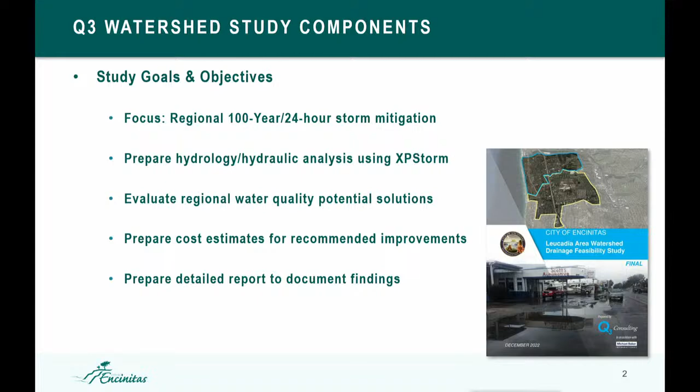It was especially with green infrastructure. So could we use green infrastructure on a large regional scale, not just a local scale? Okay, so that was one of the initial goals, to evaluate those opportunities. Yes, that was one of the initial goals, to take a look at a region. Thank you. Regional, yeah.

Okay, so as Jill mentioned, our focus here was a regional solution for, at the time, they were calling it big water. So 100-year, 24-hour, not necessarily looking at small solutions to individual locations that might flood, but rather can we identify a solution for a much larger region to get rid of some of the major flows and some of the major floods that the city was experiencing?

So right here we have the study areas. The two main study areas were Leucadia and Old Encinitas, and this was the original scope. And what we found out through the very beginning of the project was the focus very quickly went to Leucadia and not necessarily Old Encinitas. We still looked at the existing conditions, hydrology and hydraulics of both major watersheds, to make sure that there weren't any other flooding issues there, coordinating that with the city staff at the time.

Tom, my hearing isn't very good. Can you pull that microphone a little closer to you? Okay, yep, absolutely. Thank you.

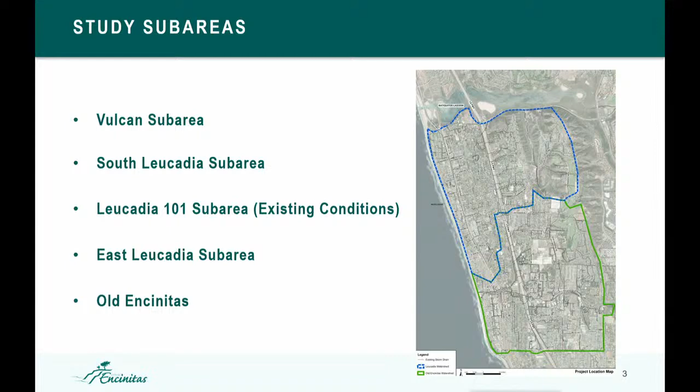So this is taking a look at the Leucadia watershed, and we divided it up into these main focus areas. And I know that there are some locations in the entire city that you can identify and point out, hey, we have some local flooding here, and we've experienced that during the process of the study.

So we looked at the existing condition hydrology and hydraulics for that based on the Michael Baker International plans at the time, which I think were about 60% at the time. So what we did is we evaluated not just their plans and the watershed, but we looked at all the watersheds and how they were linked together to come up with a solution for the entire city or the entire region of Leucadia.

This is the old Encinitas, so we identified all the storm drains. We ran the hydrology and the hydraulics. And we were surprised to see that we found a lot of local little minor locations of flooding, but there was really no regional flooding. So that was confirmed by the city staff as well. So our focus went quickly towards Leucadia.

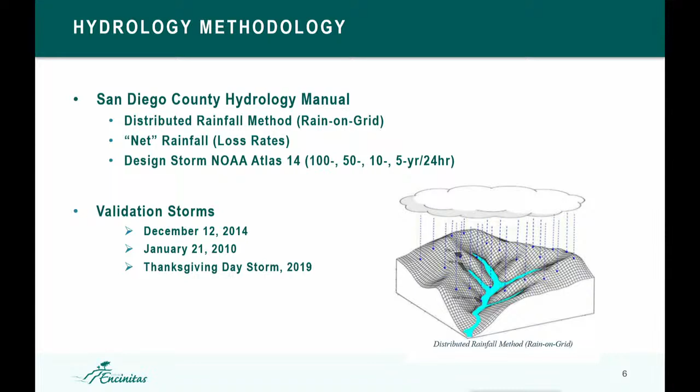So what that means is we actually got the rainfall data from that storm event. We let it rain on our stormwater model, and we looked at the results and we tried to compare that to what the photographs really were. And so that really helped us understand how accurate our models were. And then we tweak it from there until we get them close to what we feel comfortable with.

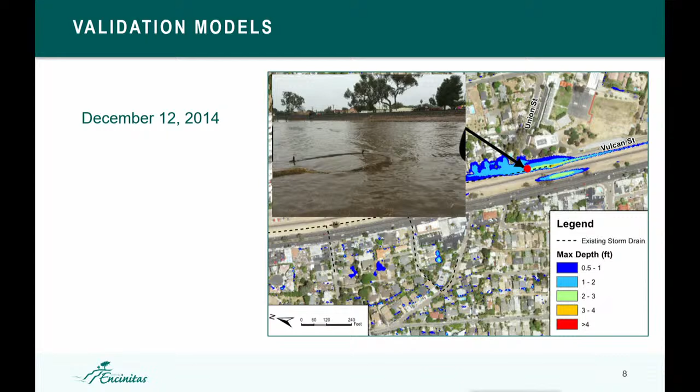And luckily, we were, I shouldn't say lucky enough, that's a bad term to use here, but during our process of our modeling, we had the Thanksgiving storm, which everybody here knows was quite large. Short duration storm event that incurred a lot of damage, especially at the park. So again, this one, we actually showed a depth of about 3.5 feet from that rain event. We actually had the raw rainfall data from the Leucadia rain gauge. And so we actually were able to model that, and we were very close with our results here.

And this is important because you want to make sure, for the most part, especially in the big flooded areas that seem to be the main concern. I understand there's a lot of concerns with every flooding area, but the main concerns of the city at the time, that we were getting at least accurate results with our existing condition models. Now that tells us when we propose a solution, we can actually see what the real effects are of that solution.

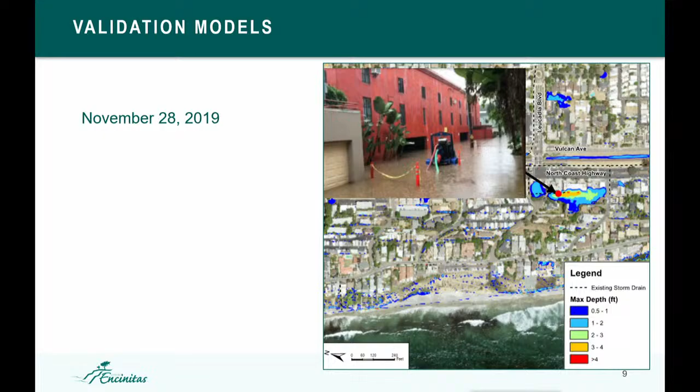That helpful neighbor, was he an Irishman? I believe so. Is he in the room today? Yes, Mr. Gary Murphy. Yes, with all those pictures. Yes. He's our librarian, yes. Yeah, whenever the city had no as-built, he would send them to me, so. Yep.

And that doesn't just mean the biggest storm event for a 24-hour event for 100 years. What NOAA does is they do what's called a nested event. So they incorporate the maximum storm event for every duration up to 24 hours. So it's actually even bigger than what you would imagine a 24-hour event is. Unfortunately, this is what you have to design to with San Diego County. I say unfortunate because sometimes it produces storm drains that are so big that nobody can build them.

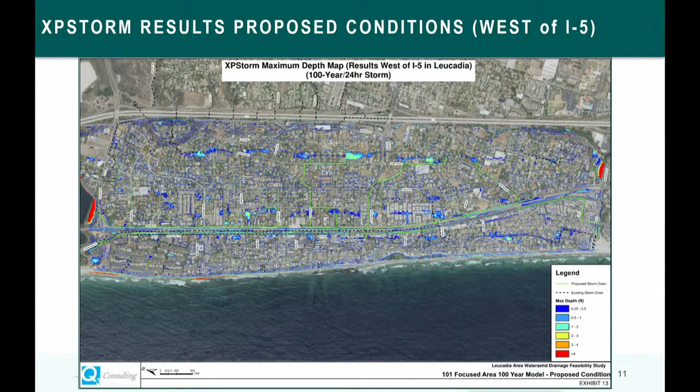So we can put really big inlets there, but the flow will skip the curb just 10 feet upstream. So it's not as easy as saying, hey, let's put a bigger pipe, because the flow doesn't get there. A lot of these flooded areas are in the back of the houses. Right. So unfortunately, if we had curb to work with, I think a lot of this would have gone away. And I'm not saying it's a bad thing. It obviously looks a lot better and it's more natural. It's just there's some problems that will come with it with respect to flood control.

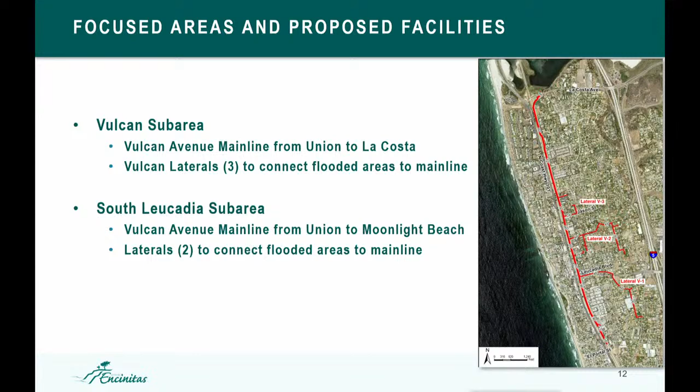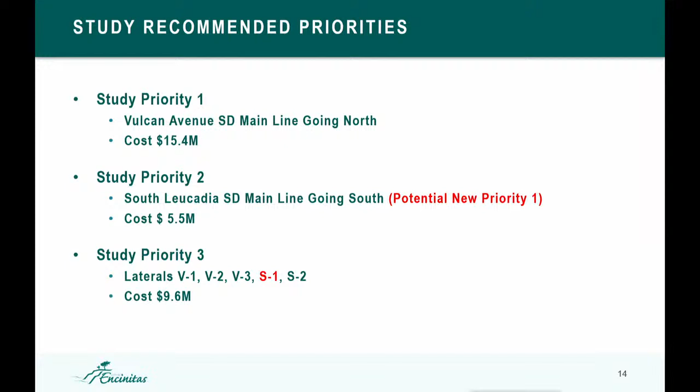So that was just kind of going through the priorities. Here in red, this is where I was talking about before, that it looks like now South might actually be becoming a priority one. The study lateral S1 would be accompanying that. So this is kind of the recommendations. The total cost at the time, again, these are concept costs. This used to be called a master plan; now it's called a feasibility study. These are really concept level, and they will be refined during design, but we came up with about a $30 million cost for the two.

So now that the study is complete, staff's role is to look for potential grant funding opportunities, state, federal, local, and then we can look at potentially phasing in these projects. If council direction is to pursue one or the other of the two main systems, we can put together some costs for the design and permitting of that first phase and offer that up with all the other priorities throughout the city during budget deliberation time. And with that, we're ready for questions.

Okay, why don't we work on preliminary questions, and then we'll go to speakers. Yes. Councilmember Ehlers. Yeah, if you could go back to the cost you just had up there, the 30 million, does that include finishing the L101 segments? Nope. And do we have an estimate for that? I think staff gave a presentation on the 14th of February that had those estimates. It would be great to get them all in one chart where we could see the total, because it just confirmed for me that L101 is the first priority, and then the second and third could be flipped depending on our preference.

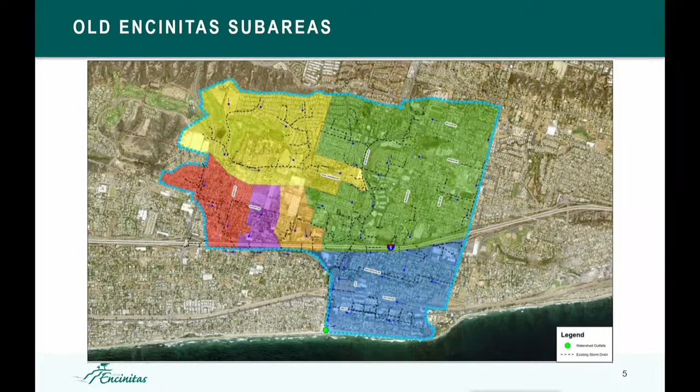But looking at that map, I want to be clear as well. The eastern portion of the city from the golf course, basically west to the freeway or to Vulcan, you looked at it enough to be able to draw the arrows and chart... not that one, the one before the yellow. Yeah, so you've got a big yellow area there, but when all was said and done, you focused almost exclusively on Vulcan West.

So I see you looked at it enough to be able to chart with arrows and dotted lines the way the water falls in that area, but beyond that, you recognized fairly quickly that there aren't many flooding problems there, and that some of the newer neighborhoods up there have stormwater facilities already, and they have curb and gutter and other things. So I wanted to probe a little bit how much time you spent looking at that easternmost area, east of the 5, in the yellow area that's on the screen right now.

Sure. So the boundary between the yellow and the red is really fuzzy. There's actually a low point in that area, so you could basically draw the red further north, or you can keep the yellow the way it is. So that's kind of a mixed area. We did actually tie a little bit into two of those areas, and I know there's a third area that we left alone. To answer your question, we had to model that yellow area

as well as Old Encinitas, so we had to be very careful and input all the as-built information into the models, the rainfall, we had to look at the land uses, we had to identify where the curbs really existed. Sometimes the topography doesn't show the flows, so we have to actually manipulate the topography to show what's really out there. But you're absolutely correct, there's a lot more curb and gutter there, so it was able to contain flows in the streets much better, and you had a lot of steeper streets in some of those sections. So yes, we did look at it, and those areas between the red and the yellow, we did identify some issues, but they were taken care of as part of the red.

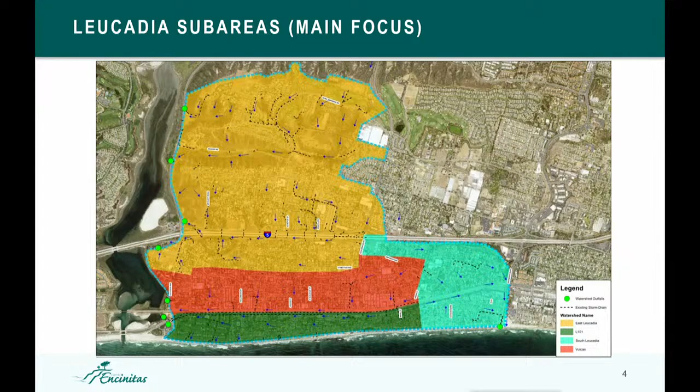All right. It's my first time up here. Good afternoon, Mayor Kranz and City Council. My name is Mike Hansberger. I've been a resident of Encinitas for 30 years. I'm here today to speak on agenda item number 1, the Leucadia Area Watershed Drainage Feasibility Study. Having looked over the study, I want to thank all the parties involved in assembling so much information so thoroughly. I learned a new word in bifurcation. As a teacher, that's always exciting.

I do want to point out what I see as an oversight in this study, and that is the flooding that happens on the 400 block of East Glaucus Street in Leucadia. I've lived on East Glaucus for 22 years. I was here for all 3 of those validation storms. I remember 2 of them very well.

I'd just like to share a quick video and a photo showing the flooding on our street and down our driveway. There's no sound, and I sped it up for time's sake, so it's going to have a little bit of a silent movie feel. But this is our driveway, and here we have what we refer to as Lake Glaucus. And what you can see is a lot of that runoff running down both the north and south sides. A lot of that's runoff plumbed off of other residences, and now we're in our driveway.

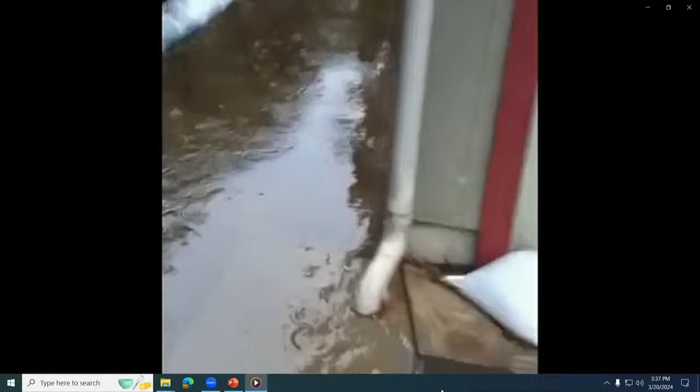So once that bowl fills up, then it breaches over and then pretty much just washes us out. And this isn't really a substantial storm. This is a good one, but we've definitely had worse. But this is basically the flow of the water as it runs through. You can see there it's about ankle deep and flowing. And then it ends up in our yard, which we share with our neighbors behind us, and then eventually it leaches through.

So, anyway, can we just go straight to the photo? What year was that? That year, I can't remember specifically, but we'll get like 3 or 4 of those a year.

So what I'm hoping is, one, that this flooding on East Glaucus can be addressed maybe as an addendum to this study. In addition, I'm hoping that East Glaucus will be considered in the alternative alignment of the V2 map in the study, or even better, an addendum to the study to investigate the feasibility of having East Glaucus Street drain down Orpheus along the frontage of Orpheus and the 5 freeway.

That's where our pump trucks go to drain water, which potentially we could access. We are a major thoroughfare, and my hope is for the safety of everyone that could be a possibility. So thank you for your consideration. Thank you.

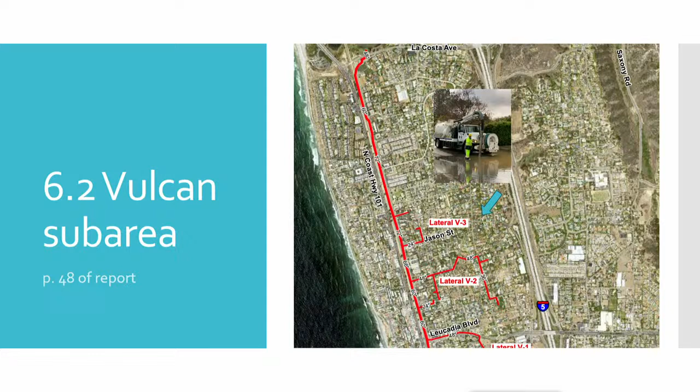As you can see, the blue arrow is where East Glaucus is, and I do want to thank city staff and everybody for helping us. We have 2 drains that collect the water now, and pump trucks do come and pump if it is not flooded in other parts too much. So the city does know we've had this flooding issue for years. Could you go to the next slide, please?

What I want to talk about is that our East Glaucus is right off of where the V2 extension is. So currently, they have the V2 going to the solid line right off of Encinitas onto a street that is a cul-de-sac, and it's dead-ended. And there's very little water that actually collects on that street. It's actually a private street, and it has a French drain, so I don't know why it's going there. The extension would be great. If we could get the extension up and over the hill, that would be fabulous.

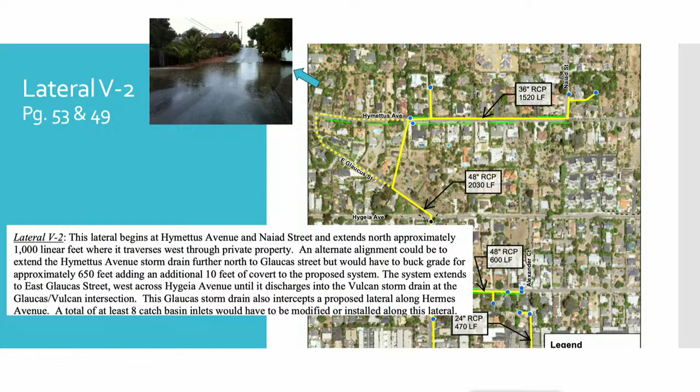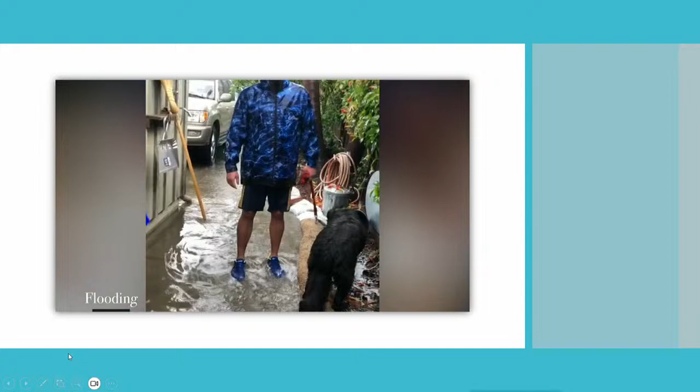Next slide, please. Can you hit play on this? So this is a more recent rain, and obviously this is not a huge rain because I'm outside. My neighbor ran his dog over because he wanted to see how bad it was. I said, well, come on down. Let me show you what happens on just an average rain. We drain the entire neighborhood. There are 10 houses on our street, and every bit of water runs down that street, down my driveway to my backyard. I actually have rain boots that I have to wear to get in and out of the house.

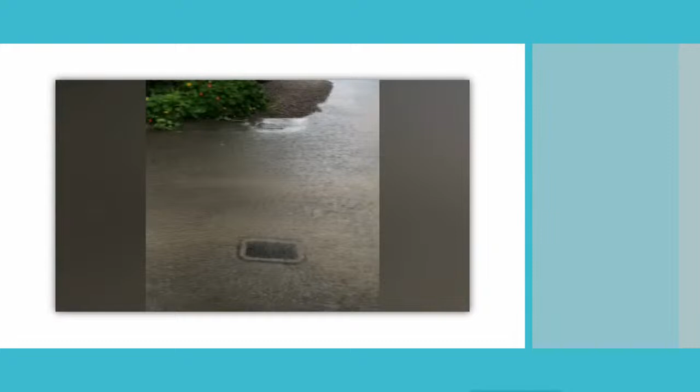If you look, he's going up the hill. Everybody's water comes down. It comes from every single spot, from Encinitas on that side, Eolus the other side. We actually have neighbors that pump water onto the street. We not only get water, we get mud, soil, dirt, contaminants, everything is running down my driveway. Can you do the next slide, please?

For the last 20 years, we've been dealing with this. And I do appreciate staff because you have been helpful. So this is why I am so shocked that our house and our street is not in this study, because it is known that we flood.

So anyway, thank you. I am sorry I didn't make any of the other meetings. I don't know how I missed them, but I appreciate you all looking into this and adding us to this solution. Thank you.

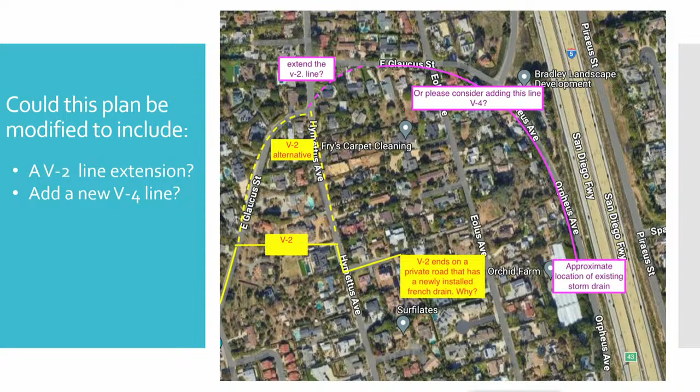Hi, guys. How's everybody? Gary Murphy, 123 West Leucadia Boulevard. First thing I want to do is I want to compliment you guys. I've been working with council since 1995. I worked with all of the consultants. Barrett did the 9-foot diameter pipe that Tom brought up, and Rick Engineering came in and did the other ones that come through here. And I've read every report. This is the first council and engineering department that went after the whole thing when you guys had Tom do the report, when Q3 did the report.

You guys have worked with me. Not everybody has, but quite a few of you have. I'm hard to work with. Tom is fantastic. Q3 is probably the greatest thing that ever happened to the city of Encinitas. And I think we need to keep him on as our consultant so that way he can help this couple right here with their problems. But he has to know all the little nooks and crannies, and him and I have spent a lot of hours. Okay, so he should get paid for having to put up with Gary Murphy.

But I want to compliment everybody in the city. I want to start with Public Works. Man, they have come so far, and they're kicking. There's Rob at Street Management, he is kicking it, and his men are fantastic. Jill and Matt are doing everything they can, every which way they can. And you guys as a council, I'm going to compliment you. I don't do that very often for councils. We got a long ways to go. There's a lot of money that needs to be brought in. We've made some good improvements.

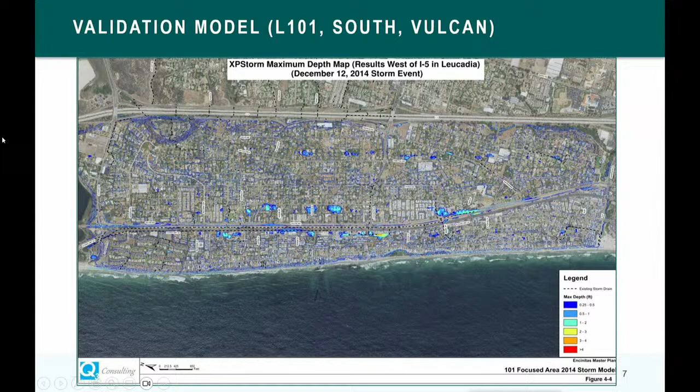Stand by. Okay. And this is important, so take your time and get it. Visually, it's nice to see if you have an exhibit.

It is good to see. But that was one of our original areas that we were looking at, and it shows up in our models as flooding. And there's actually another area too that's very similar. Just a little bit more then on how you prioritize. You said it didn't reach the priority level in what regard? Why? Usually that means what the city's focus is on with respect to what they consider important.

So we have hydraulic capacity as one, so this would obviously be a higher priority on that aspect. It also goes down to what regionally they believe is important, and you made a comment about the private street. That was more that we were going by it anyway, so I actually just made the call to extend a lateral there, because one of the priorities was from the south of there. So we had to take the V2 line up that way anyway, so I'm like, I'm just gonna go grab that area because it doesn't look good. So that's kind of how that all happened.

It helped that low point because they also have a dry well that doesn't seem to be working as well. But you're right, I think a future project could be to go and grab that with an 18-inch pipe. Okay. Now we understand that those dry wells are probably not making a big enough difference. If I could just summarize, there have been a few things that have occurred that we now know better since this report was completed. Yeah. And maybe we could fine tune some of that. Yeah, exactly. And really improve our knowledge and our response to these.

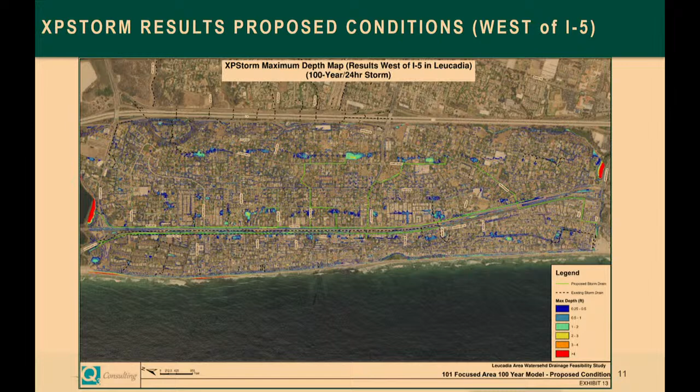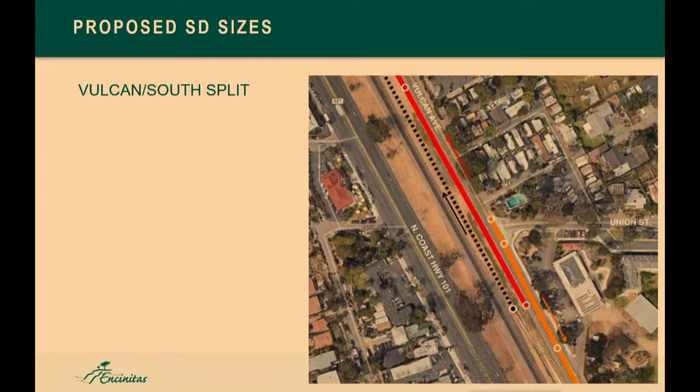Yeah, let me try to find a difference map. So the green one, is it? It's one of the extra ones. It's the green one, like at the end. Yeah. There. This guy? Right there.

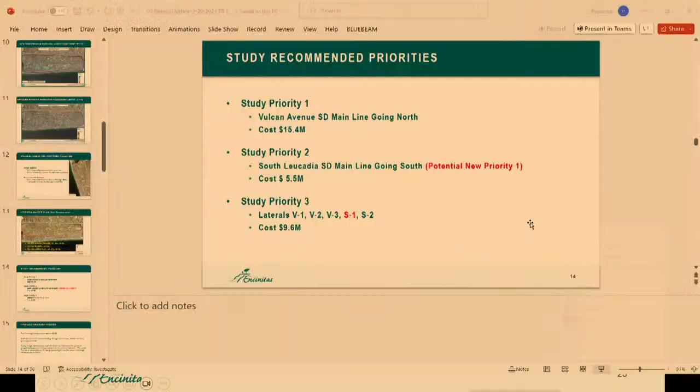And, can you zoom in on just this? Use a mouse to show where. Let me see. Oh, sorry. Hold on. Yeah, there you go. So go up. Yeah, right there.

So there you see the Glaucus Street to the left of the big green blob. That big green blob is what that private storm drain can pick up. So we could actually, like we were discussing before, extend an 18-inch pipe out to Glaucus Street. You would have some pretty deep depths to construct that pipe, but it can be done. At the time, again, I wasn't involved, the decision was to not do that area.

But to go back and answer your question, I don't know. I would have to look at this drainage area a little closer to see if we could, for example, in the north, take some of that flow north instead of down into this saddle. Okay, and I'm not trying to solve it tonight. We received several emails from various neighbors that had maybe not this bad, but similar types of problems. So as we move forward, my goal tonight is to identify the big improvements we need in order to take the water away, so that we can then do smaller, much less expensive laterals into the necessary places. And this is going to be a long-term investment.

Yeah, so one of the goals when we do these types of facilities is we try to get it so you can tie in to these main lines any one of these little flooded areas, and it should take it. So we were pretty tight with these sizes here. For example, there's a couple little locations I would like to take a look at. The V2 might have to be increased slightly as far as the size of the pipe downstream of the connection with V2 and the new proposed pipe. And there's a couple locations to the north of this I think you could probably grab as well and put them into the main Vulcan line.

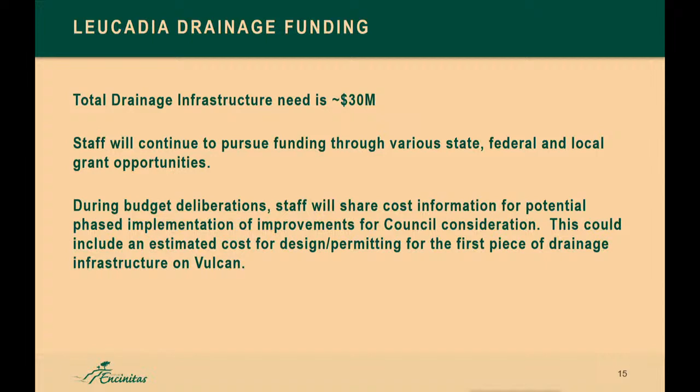And then when I look at the report, one of the things that occurs to me, I'm a kid that used to love a good rainstorm. I grew up on Ocean View Avenue, and the first thing I did towards the end of those storms was go ride my bike through the big puddles that were on Orpheus, and that was really a lot of fun. That was when there were a lot of greenhouses and a lot of open fields. The homeowners there don't really like the puddles anymore, so we pump, right?

But one question that I have when I look at this and what you've proposed is maybe we should be looking more to go east and using the facilities that Caltrans has. The Hansbergers talk about the pumping truck dumping into an Orpheus pipe that runs north to Batiquitos. That's obviously north of Leucadia Boulevard. But when you look at where Orpheus floods, say in the vicinity of Puebla Street, is there a way to take that water north and use those facilities that Caltrans has?

And that would alleviate all of the Orpheus water from even having to figure out what to do with it when we move it to Vulcan. So I don't know if your study looked at any of those options or whether it was all about downhill west, when really there's a lot of downhill east of Orpheus and Eolus.

Yeah, I was lucky enough to have at least an understanding of the drainage facilities that run along the west side of the 5 freeway, because we did a lot of projects there with Caltrans. We actually developed a constructed wetland and an infiltration basin right there at the La Costa off-ramp. So that storm drain actually is running pretty close to capacity as it is. So it didn't really occur to us to move flows from the Vulcan north. We didn't really look at it because they're running pretty close to capacity.

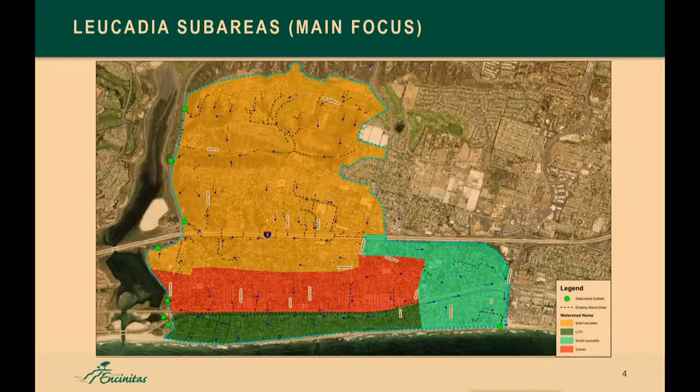One is I see that, at least where the red line is on these drawings, the red line for Vulcan, east of the railroad tracks, is in the railroad corridor. And my hope is that we're not thinking that we would put a significant investment in the railroad corridor. Okay, so that's more like in the middle of Vulcan is what the end result will be. Correct.

So my knowledge of the flooding at Glaucus and Hermes and the challenges that we have there, West Seacrest has told me, and I've learned more about challenges down by Jason as well. But the question that I have is, was there any thought given to taking the pipe down Hermes, at least to Jason, or maybe even if you look at the cul-de-sac on Hermes,

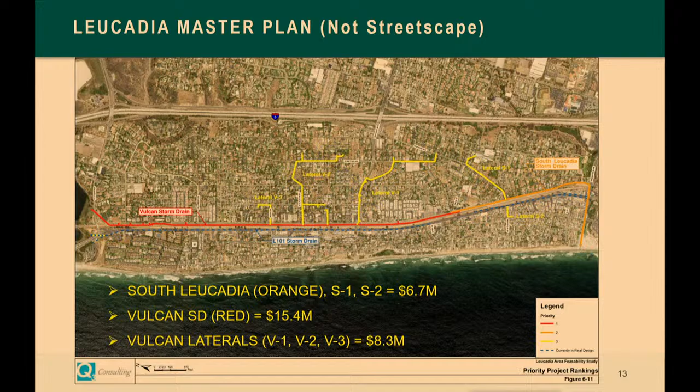we might have to negotiate some easement rights, but taking it through the yards to Sanford so that we can avoid, because then we're not moving the water west, we're essentially capturing it where it hits the bottom of the bowl, because there's a crown between Hermes and Vulcan that naturally wants to keep the water in that bowl.

So instead of putting the pipe, and maybe it's because south of Leucadia Boulevard, we have to put pipe in Vulcan. And so you don't have to answer this question. It's just one that I want to float, the idea of being a little bit more intentional with addressing the bottom of the bowl at Hermes, which is a critical issue.

The other question I have, some of your yellow lines for these proposals are going through private property. And so are we assuming that we're going to negotiate easement rights? And is this trenchless pipe installation, or are we going to trench through yards? Well, for example, on this particular image, this V2 going up Glaucus Street, see how it kind of comes down angled? That was discussion of, yes, we would like to see if we can't get an easement. The whole purpose of that is because you'll be bucking grade and it'd be much more expensive to take it

all the way over. But now if we want to go and pick up Glaucus East, that might be a better way to go. So that would take that out of the equation. You won't have to go after that easement. But there are a few locations where we do need some easements. And is this all digging trenches? Yes. So there are some areas where this could get quite deep digging a trench.